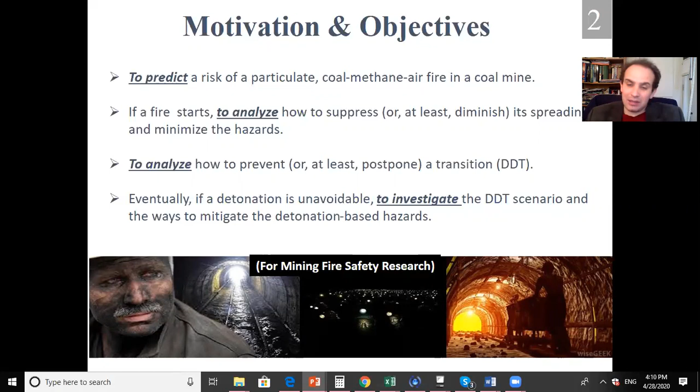While pressure rise up to like 1 bar, comparable to 1 atmosphere, can really kill people and crush even structures. So that's something serious. So when you look at this picture, why do I show this? We have some kind of coal mine tunnel, right? Does it remind you of something? Remember, we spent a couple of lectures on flame acceleration and DDT, and talked about the finger flame scenario. Why? Because finger flame is Reynolds independent and scale invariant. So it can be a nanotube, a microcombustor, but it can also be a tunnel like this coal mine.

So basically, imagine you have a coal mine, a long tunnel, and you have a sudden explosion somewhere at the center of the corner. Let us describe very qualitatively what will be the stages of fire propagation. What happened first? You may see on this picture. First you have ignition, a micro explosion, and then your premixed flame in your air dust environment will propagate, will expand, first spherically with a smooth front. But what happens next? Two things may happen. One thing, remember finger flame acceleration: when you start approaching the wall, it will be like this.

But also, in fact, coal mines, it's a big domain. It's actually 2 meters of diameter. So the Darrieus-Landau instability may and will develop in this configuration.

Here it is. So the Darrieus-Landau instability will develop. So instead of smooth flame, you will have cellular flame structure and the flame will accelerate. Later, you will have this kind of two-finger flame that will propagate faster to the walls.

After this, what will happen? It will be a wall friction scenario. But remember, wall friction scenario is not very important because here we have a big Reynolds number. So most likely now in the mine it will not be significant.

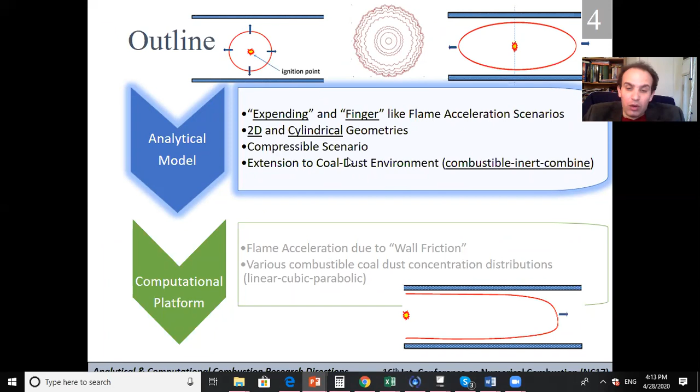Do we know all of them? Yes, we do. Remember, this is chapter 10. This is chapter 11 and 12 together, right? Actually, chapter 12. So that's what we are going to do. We will consider expanding and finger flame acceleration scenarios, and we will develop it. And also, I will show we have a computational platform that allows us to consider how flame propagates.

So, finger flame—again, what I will show you here, if you are very good students, you may remember it from previous lectures. It will be nothing new here, but it will be new how you can combine it. Remember the finger flame scenario? Remember how it goes. Here you may see a movie of how finger flame goes from the axis, and that's what you have. You have a channel, you ignite your finger, and it goes.

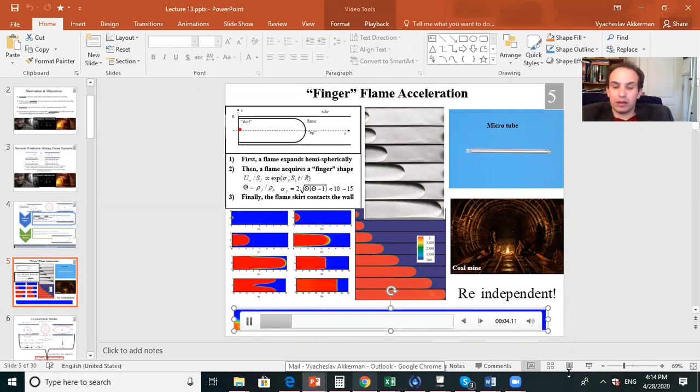Let me show it here. This mode. It goes, because the initial stage of propagation is quite long. And here on my screen it goes, and you might see the whole scenario of how the flame shape appears. It goes, it accelerates until the flame skirt touches the wall, but then acceleration stops.

And what is important here, you may see two things. One, that you will have the same scenario in micropipe and in coal mine. You will have the same flame acceleration with the following exponential acceleration.

So what is our analytical model? What can we do? Here we combine expanding flame theory—remember expanding flame theory, remember this formula for the Darrieus-Landau instability, how flame accelerates—and finger flame acceleration. How do we combine it? Rigorously you should simulate it directly, which is difficult, but we do something simple, because you may realize that when I talk about coal mine, when I talk about a big flame surface, I mostly should not care what happened on small scales.

So basically what I will consider is finger flame acceleration, but instead of planar flame parameters, instead of what we call SL for finger flame acceleration, now we will have the Darrieus-Landau parameters. So instead of planar flame velocity, I will have the Darrieus-Landau velocity, which depends on the characteristic size, which depends on the Darrieus-Landau cutoff scale.

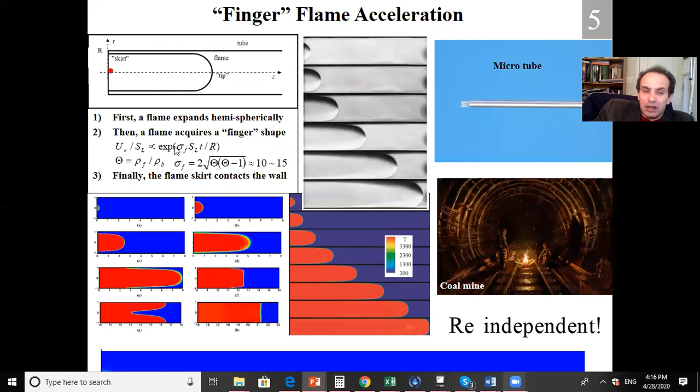Everybody remember this? Again, I don't request you to rederive these formulas. If you did homework number 5, you should be flexible with this. But I want you to realize that what we are doing is we take finger flame acceleration theory, but now instead of S_L, I will have a time-dependent Darrieus-Landau term, which shows much faster acceleration.

And if you do it, that's what we see. That is your finger flame theory. You may see that first you have hemispherical flame expansion, then your flame will become elongated, and then it will touch the wall. Here you may see the characteristic timing, characteristic equations, at which the flame will have transition from spherical to finger shape, and at which time it will touch the wall.

Here they are—just the timing, and you may see this time versus equivalence ratio. And here we can see it for methane, also propane.

You may ask me, why do we talk about propane? For several reasons. One, I am physicist rather than engineer. I always, when I investigate methane propagation, want to have some other fuel to compare, to have comparisons to see, because propane is much more explosive, we want to see how it goes.

Second, we don't talk about coal mines only. Very often in subways, in other setups, we may have propane explosion. For instance, propane is classical cooking gas that people use. And if you talk about future subways with tunnels, which have cars filled with fuel tank, it can eventually be propane explosion. Plus in coal mines, very often people use some kind of devices that may contain propane.

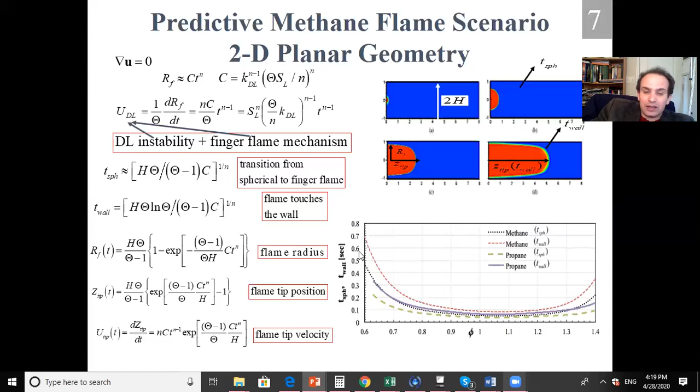So here you may see characteristic flame propagation characteristics versus here upstairs. You can see the stoichiometric combustion, and you may see how flame tip velocity, flame tip acceleration, and flame tip position change with time. Here is acceleration stage from T spherical to T wall. This is when flame starts propagating and did not touch the wall yet. So you may see this acceleration, it's quite big, so your velocity can attain 600-700 meters per second.

I want to also point out flame tip position. So basically it will go very fast. This is our timing. In 0.1 second, in 100 milliseconds, flame will penetrate through 8 meters. So it's quite big, quite fast. So people cannot run away from it, but some robots, some devices can turn on alarm, they can do it. And even some person who will not survive in this catastrophe may put some button on the alarm.

Typically why also these timings are important? Because what is the smallest time that you resolve? What is correct? Because when we talk, we count by seconds, right? But what is the smallest time that your eye resolves? Well, it depends on people, of course, but you know the effect of cinema of the 25th frame. Because in almost any movie, typically you have 25 frames, at least you should have 24 frames per second, then you don't see how they're changing. It means that your typical resolution time of your brain, of your eye, of your ears, is about 50 milliseconds, something like this, one 20th of a second.

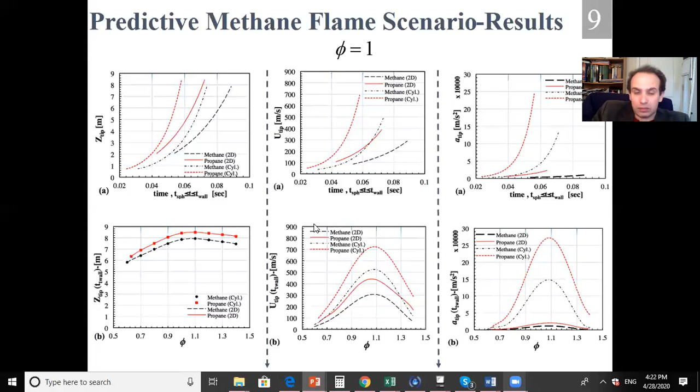One of the key parameters of combustion is what people call run-up time and run-up distance. What is run-up distance? It's how long does it take, distance and time, for a flame to detonate. So we start with a flame, it accelerates, and eventually detonation happens. Estimations we make here are quite raw, by order of magnitude, but it's okay, because when you want to survive, it's okay to see how much time you have - seconds, milliseconds, or microseconds.

So how do we estimate here? We know the following: detonation is supersonic, deflagration is subsonic. So by order of magnitude, when do you switch from flame to detonation? When the velocity becomes, by order of magnitude, sonic velocity. So that is what we do - we know how the flame goes, and when flame tip velocity becomes sonic, it means that it may detonate.

This allows you to find characteristic timing and characteristic velocity. What you see here is for two-dimensional, and if we talk about theories, we consider two-dimensional and cylindrical configuration. You may ask, why cylindrical? Dr. Derek Johnson once asked me, when do you see a cylindrical coal mine? My answer is: I did see a cylindrical subway, and in a subway it propagates like this. Regarding 2D, well, 2D is a simplification, but typically we may have a rectangular or square cross section, which resembles this. So we have theories for how flame run-up distance - the detonation distance at which detonation happens - depends on phi.

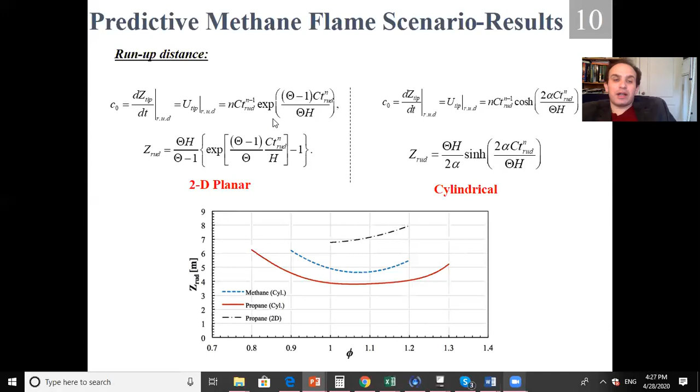Now, another point: in reality, we are more lucky than you may see here. Because remember, when the flame accelerates, it slows down. We discussed it. And eventually it saturates to some steady regime. So in fact, here are equations that we can use. We have an isentropic approach for density, pressure, and temperature.

We extended it. Again, my task here is not to teach you how to solve these equations or ask you to reproduce them. The idea is to teach you what you potentially can do in combustion research, right? This is a fundamentals of combustion course, and after you pass it, you should know what book to open and what research directions exist.

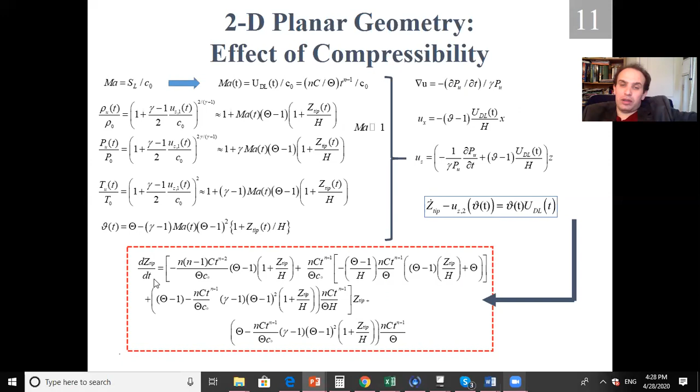So basically, this allows you to account for compressibility, and we come to the final equation which describes propagation with account for compressibility in rectangular, two-dimensional configuration, and in cylindrical axisymmetric configuration. Here it is. So you may see on this picture that it's really important to account for compressibility. So we are on the safe side. And now I talk about finger flames only, not obstacles yet, because obstacles and wall friction used to be considered small.

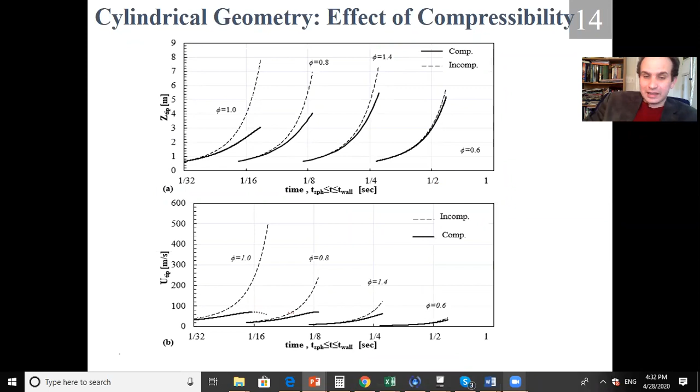Okay, so now, the next portion is most important. Why do we talk about coal mines when I talk about methane explosion? Because there is dust in coal mines. It is the dust mixture with coal that gives you something. So in fact, even if you have premixed combustion, you have a mixture of what?

What are premixtures? You'll have a mixture of methane and dust. Dust is solid; these are dust particles. Their typical size is quite small, some kind of micro, like from 10 to 100 microns. They're quite small, so you hardly see them. So what will you have? You will have gaseous combustion with these kinds of particles.

And how to deal with it? How to investigate it? Of course the correct answer would be, okay guys, you should do simulations or some kind of measurements of multi-phase flow. If you want to do a serious study, you should consider multi-phase simulations. But we are lucky that we can do something easier. There is the so-called Seshadri formulation, which allows you to incorporate solid particles, dust particles, into our consideration.

So what do we do? You realize, in fact, that there are not many dust particles in methane. Your dust particles, typically it's 100, 120 gram per meter cube. So the volumetric fraction does not exceed maybe 1%, even 1 promille. Mass fraction is larger because it's solid, but it means that you are lucky. There is a way how you can describe it. Instead of considering multi-phase flow, multi-phase fluid, we do some simplifications.

It's lazy but sophisticated. Instead of considering methane combination with coal dust, we will do the following. We will consider an effective fluid. I will say I have effective methane, effective fluid. So I will replace my gas particles by some effective fluid. But in this new effective fluid, transport properties will depend on dust. And that is the Seshadri formulation, that's how we can incorporate it.

So instead of planar flame speed in this new system, I will have dust-induced flame speed. Does it make sense? And it will exactly play the role of planar flame speed. You may ask, how can you do it? Very often people ask, why do we talk about gas, about fluid mechanics? Because when you take a cigarette or burn any kind of wood stick, it looks like it's solid.

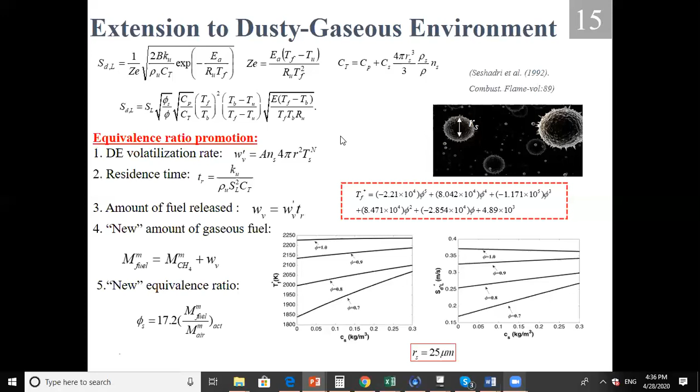So what we can do here is account not only for combustible particles, not only coal, but sand as well. That's what we do. And this allows us to extend our formulation. What will happen? Here will be our new modified equation. And you will see what we account for here. We account for the modified equivalence ratio. And here we account for the so-called heat sink effect.

It means that your particles will get heat from combustion, which moderates the fire. But on the other hand, after this, it will promote the equivalence ratio, it becomes an extra source of fuel. And we realize it is dust particles which actually give you promotion, which actually explain why fire happens.

Again, the Seshadri formulation is purely theoretical work. It was 1992. Dr. Seshadri is a professor at the University of California, Santa Barbara, if I'm not mistaken, San Diego, I'm sorry. He works on fire safety there, but not for coal mines. He just developed how planar flame speed depends on solid impurities. Here, what we managed to do is incorporate these formulations to consider an effective fluid.

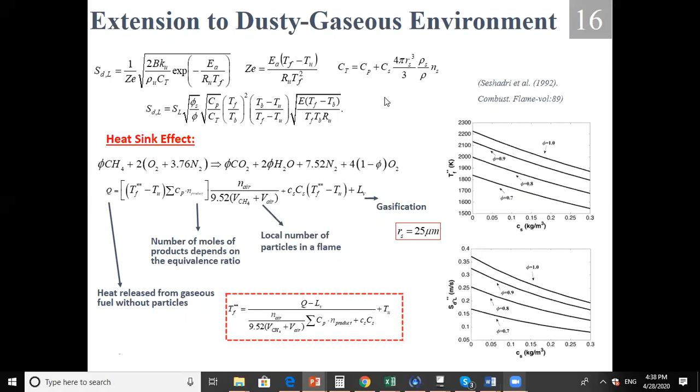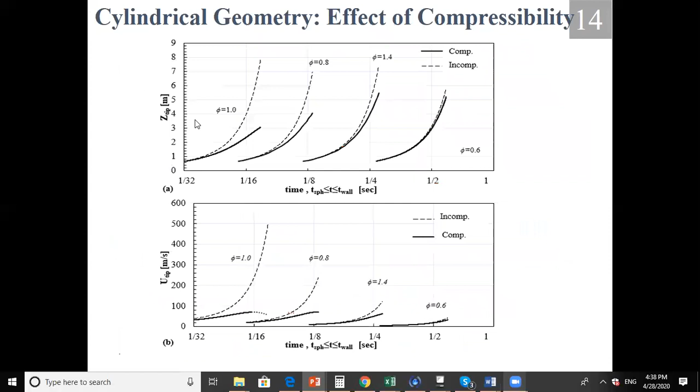So basically, here you may see what we can do: combined effect of promotion and prevention of acceleration. And here are modified versions of what we saw before. So remember, let me go back here. So here was how the flame propagates. This is flame tip position, and that is flame tip velocity for compressibility, how it changes with time.

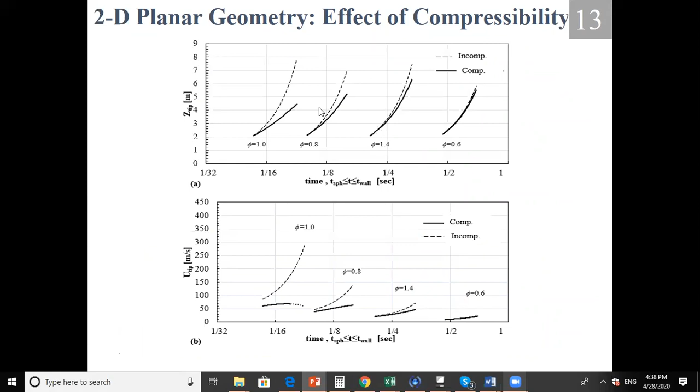Now I will show you the pictures, how they look when you incorporate particles. Again, the dashed line shows exponential acceleration, the solid line shows the effect of compressibility. And again, you may see that when you have slow acceleration far from detonation, it's okay to employ the incompressible formulation. But when you come closer to it, you should consider compressibility. So here it is.

What you will see here, we incorporate different scenarios. Here we incorporate coal particles, and this is flame tip position. On the right-hand side you have cylindrical configurations. Here you have rectangular configuration. Here, time dependent. So this plot corresponds to coal particles of size 10 microns. This one corresponds to 75 microns, and this corresponds to no particles.

So you may see that in all the cases we consider equivalence ratio 0.7. You may ask why it's so big, but in fact, here we already account for the effect of particles. It's already a promoted equivalence ratio. And if you took an equivalence ratio like 0.5, without particles it would be too small and there would be no combustion. Another point is concentration. Here we take 120 grams per meter cubed. It's the typical concentration in this condition. Again, two particle sizes are considered, 10 microns and 75 microns.

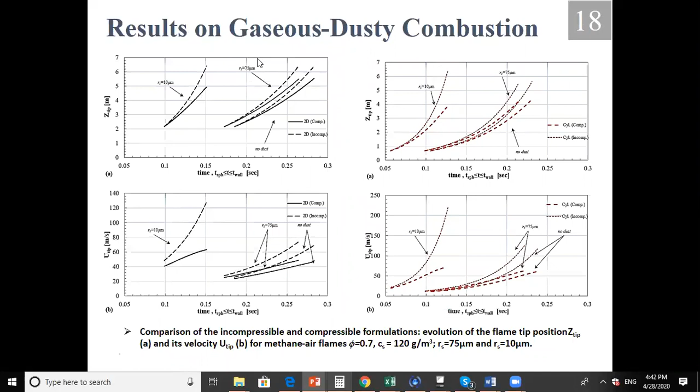And now something curious. If somebody wants a bonus ticket, please explain to me why here I have a declining line for the tip, but here an increasing line. Before, tip position and tip velocity were quite collinear, right? Because this is the derivative of this one. Why here do you have a monotonic increase for tip position, but a monotonic decrease of the velocity? And here it's vice versa. What do you think? Why are the trends opposite?

Please think about this for a couple of minutes. Maybe not a couple of minutes, because we should end the lecture in 15 minutes, but a minute. Does anyone have an idea about this?

Well, the answer is quite simple, because in fact we talk here about maximal velocity and maximal position when the flame attains the wall. So it's not this one on the right, it's not the derivative of the left-hand side. Because what happens? The flame propagates and touches the wall. So the faster the flame velocity, the sooner it will touch the wall. So its propagation will take less time.

So basically what we have here, if your tip velocity is lower, it will touch the wall later, so the tip will be larger. It's very simple. The slower you go, the longer you will survive. But the key point here, you may realize the effects. So definitely inert particles kill the flame, they slow down the process; combustible particles promote it.

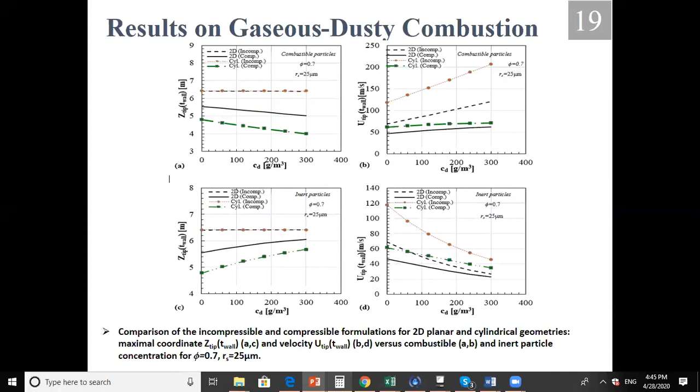We started with gaseous combustion, then we incorporated particles. And we combined the theory of expanding flames, this is chapter 10, and added finger flames, chapter 11, and we described it. Another thing I can show you is we also have our solvers. So if you want to simulate coal mines, we can do exactly the same story that we did before, because we managed to incorporate coal particles into the solver. Again, we incorporate the Seshadri formulation.

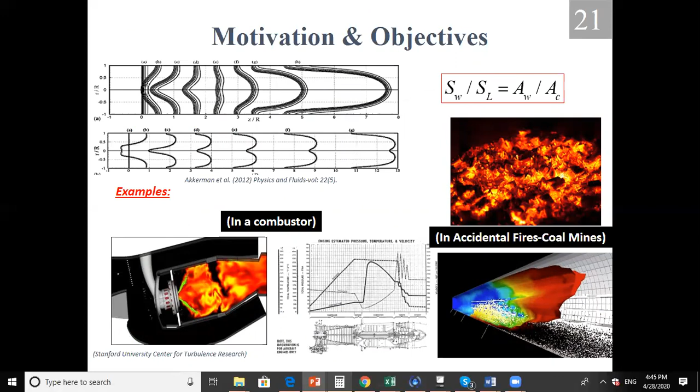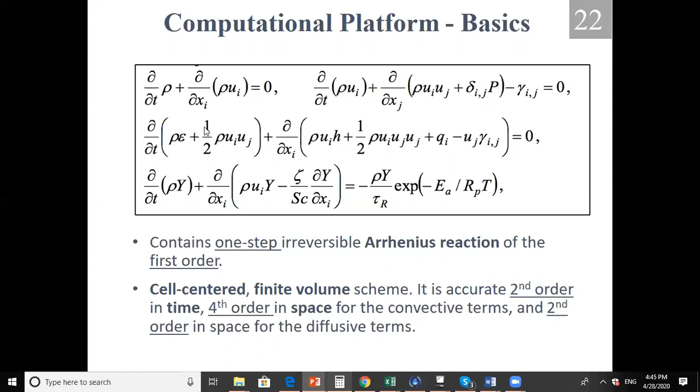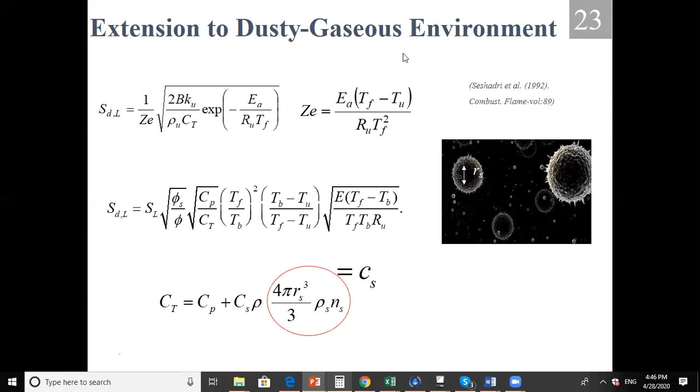So here, if we talk about simulations, is our classical platform that we use. You may know that it's continuity, Navier-Stokes equations, energy, species. And what we did, we employed the Seshadri formulation to deal with it. Again, it doesn't mean that you should use our solver, but that's the way you incorporate it. So now, instead of using multi-phase simulations like people do in ANSYS Fluent or Star CCM or other solvers, potentially you can incorporate the Seshadri formulation and deal with effective combustion.

And what we also investigated was an interesting point, because very often people ask, what is the real dust distribution in coal mines? And that's what we investigated. Because if you have different distributions, it can promote or slow down the flame acceleration. For instance, in a finger flame, the flame tip propagates in the fastest manner, while the flame skirt propagates in a slower manner. So you may realize that if the flame tip goes through dust while the flame skirt does not, you may elongate

or compress the flame. So we considered different kinds of scenarios. We considered different dust concentration distributions inside the channel, inside the coal mine, and saw how they promote or prevent the flame. Here you can ask me, what is the real distribution in coal mines? And my answer is, I don't know. For a couple of years, nobody could actually give me a real distribution.

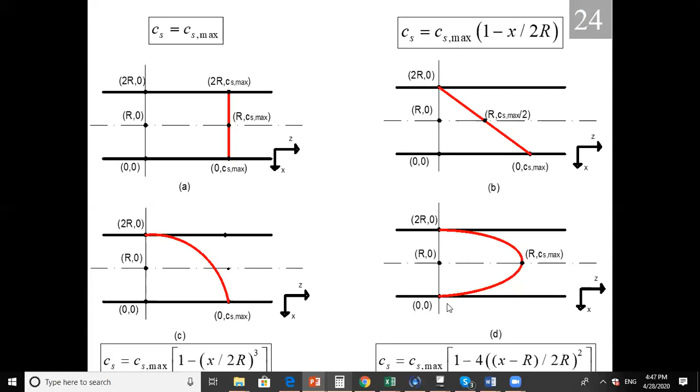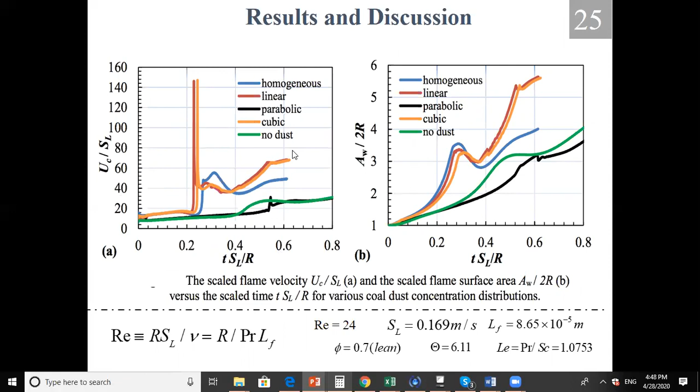We made simulations of how the flame goes with time in the case of homogeneous distribution of dust, linear, parabolic, cubic, and in the case of no dust. And that is how flame velocity changes, this is how surface changes. Remember pictures like we saw in the previous lecture. That was for finger flame acceleration and for the wall friction effect. Here we do the same, but now we incorporated these various dust particles.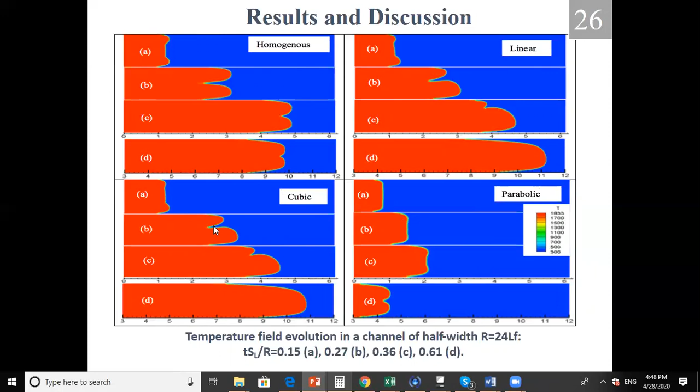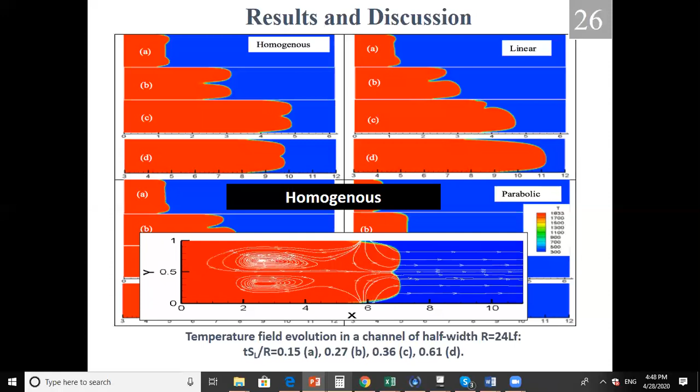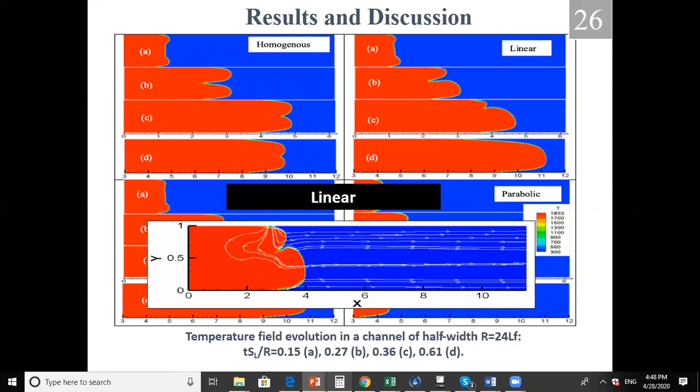And you may see these strange features, because now you have different dust distributions: homogeneous, linear, cubic, parabolic. This is exactly what you saw in lecture 12. And that is how it will be when you non-uniformly modify the dependence. And our result, I hope the movies will show how it happens. That's how homogeneous goes. It's uniform. That's how linear goes. When you have a linear distribution, you see it gets elongated and propagates. That's how the cubic distribution behaves.

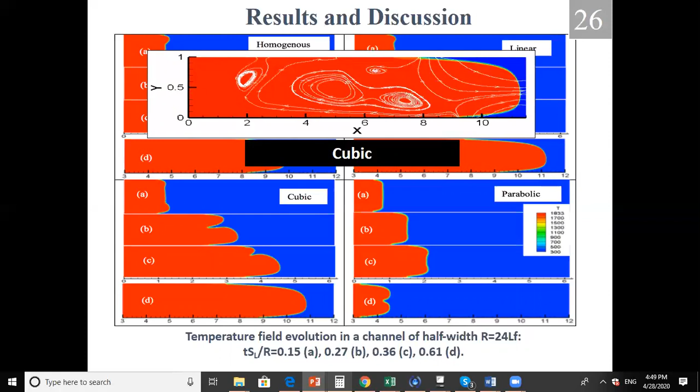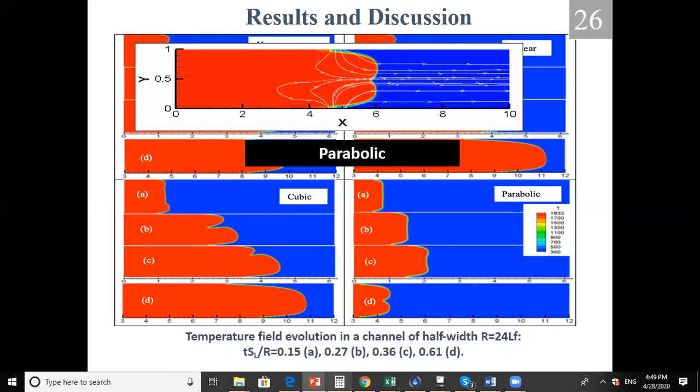And that's the parabolic distribution. Well, you may see that definitely parabolic and homogeneous are symmetric, while cubic and linear are non-symmetric. So basically what our conclusion was here, I can tell you, that, well, was it my last slide?

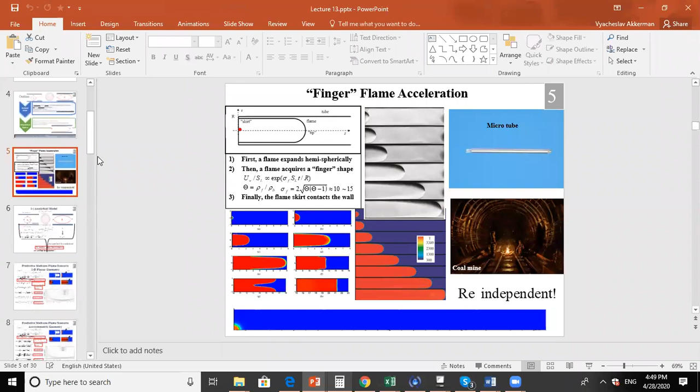Yes, it was last. So basically, the preliminary conclusion from here was that we are lucky that any kind of distribution provides slower flame acceleration than uniform. And you cannot have uniform distribution in coal mines. And this gives you another strategy how to deal with this, how to avoid, how to kill the flame. Because all distributions will actually suppress flame elongation, suppress the geometrical effect.

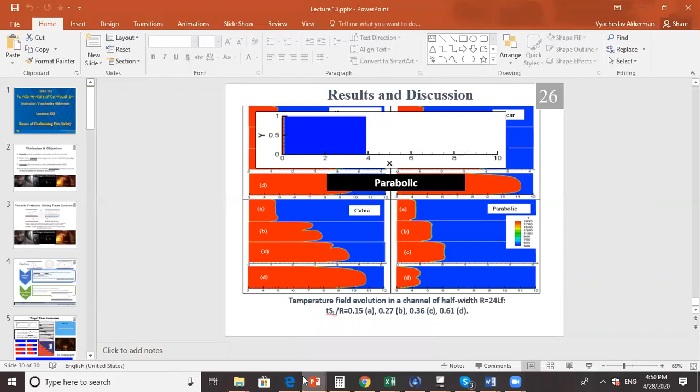Okay, that was chapter 13. Please ask me questions. Please ask me questions. May I believe that everybody understood everything?

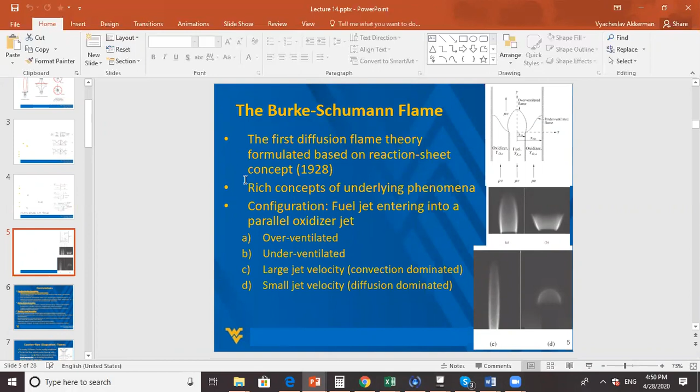Well, there is one more chapter, chapter 14. I will not go through all this chapter today, and actually I will really limit consideration here. But the key points that I want to discuss here, I just want to give you basic hints. So far what do we deal with? We talk about diffusion flames and premixed flames, and most of the course was about premixed flames. And I mentioned a little bit that sometimes we deal with partially premixed flames.

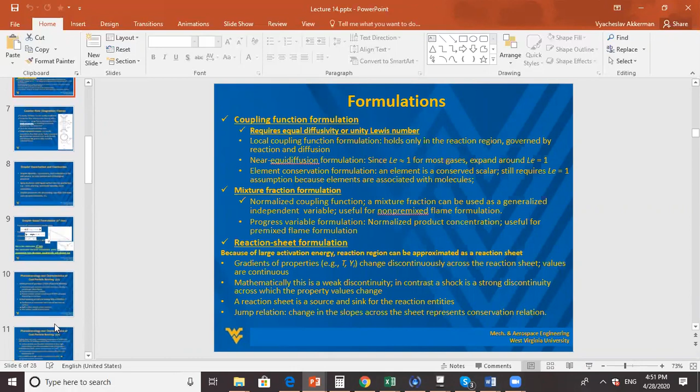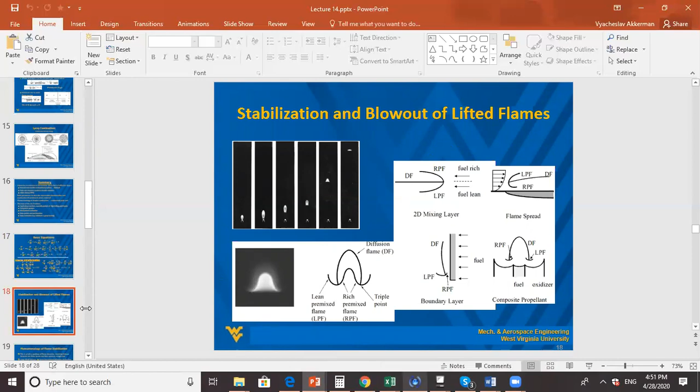So what I want you to realize, and actually what I will talk about, is that sometimes we have a combination of these flames. A typical scenario happens if you have a picture like this, you may see on my screen. So basically that is the so-called triple or tribrachial flame. Imagine you have a nozzle and there is a flow from the nozzle. I think I should show the configuration, yeah, like this.

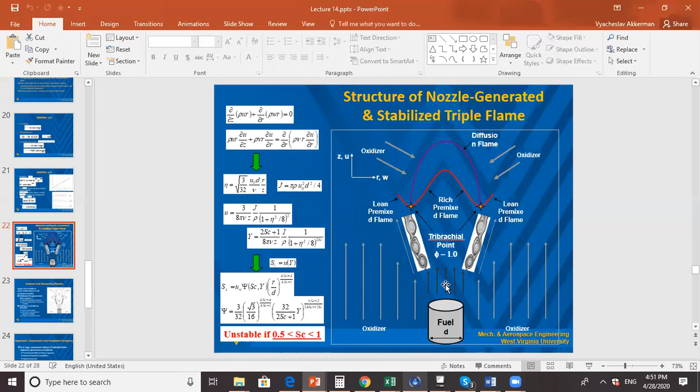So basically, imagine you have some kind of fuel which goes here, and you have oxidizer which goes here. That's the classical scenario that may happen in rockets, when you have any kind of nozzle, any kind of propulsion. So generally speaking, what will happen is a diffusion kind of flame. We have about 10 minutes, so I will show a basic introduction. So typically, in the bulk flame, most combustion happens here in a diffusion mode, isn't it?

But here, we also have mixing. So fuel is mixed with oxidizer here and here. This mixing actually provides some kind of premixture. And in addition to this diffusion bulk flame, you will have two premixed modes here, and the same here. Sometimes it will be a whole premixed mode, or sometimes it will be just partial. So here is the general picture. Sometimes it can be attached to the nozzle, sometimes it can be lifted up.

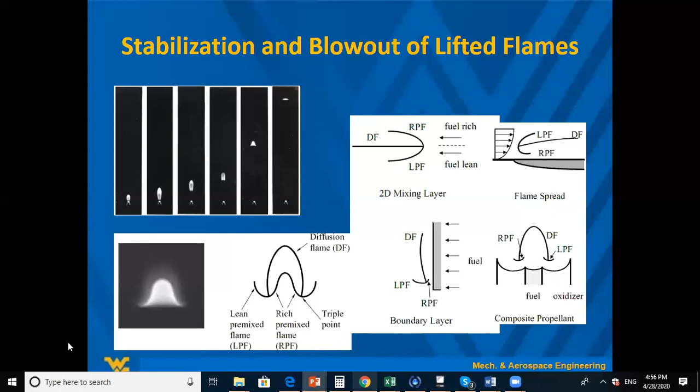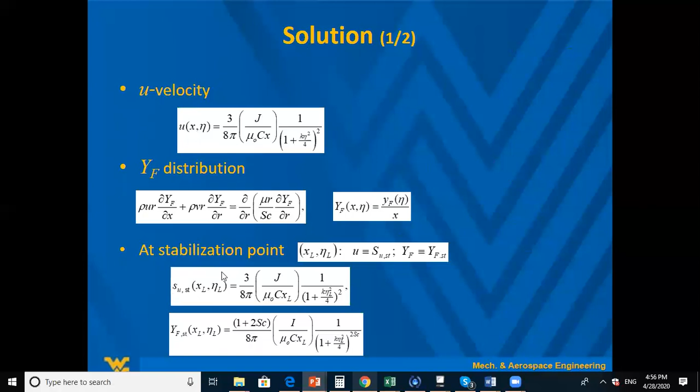Remember the Bunsen burner and homework number 4 - it was a question about the Bunsen burner, when it was compensated by the flow. We said your planar flame speed cannot exceed flow velocity. Same story here - you have flow velocity, so when you generate a flame, it's generated such that it's balanced by the velocity. It's your nozzle velocity which generates the flame. So at the stabilization point, your flame and mixture fraction become a function of the inflow velocity.

That's really nice to realize, and we have steady conditions. So basically that is my structure. If I want to describe this picture, this flame, we see that your planar velocity is now a function of flame and flow parameters. It will be a function of the radius of this channel, of position, and of the diameter of this channel.

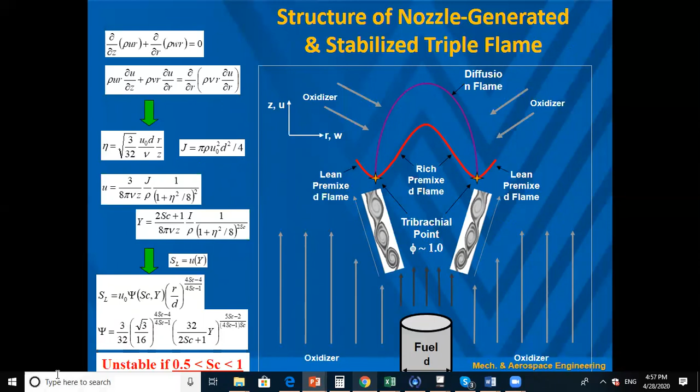There's classical theory by Chung that only if the Schmidt number - remember, Lewis number is the ratio of Schmidt to Prandtl number - when Schmidt number is in a certain interval, you may have stable or unstable solutions. I want to recall the different components of how we consider instability interaction with combustion: Rayleigh-Taylor instability, Kelvin-Helmholtz, diffusional, thermal, and parametric, as we discussed.

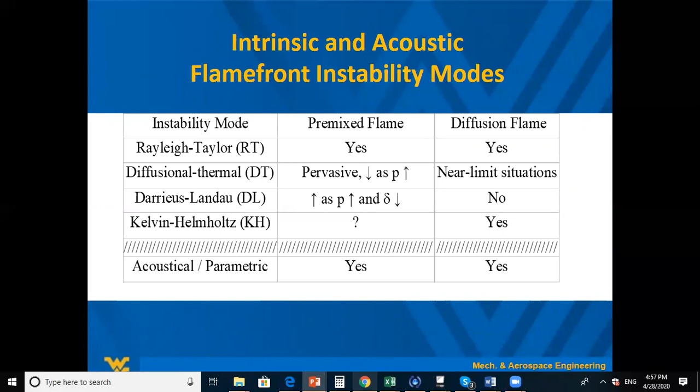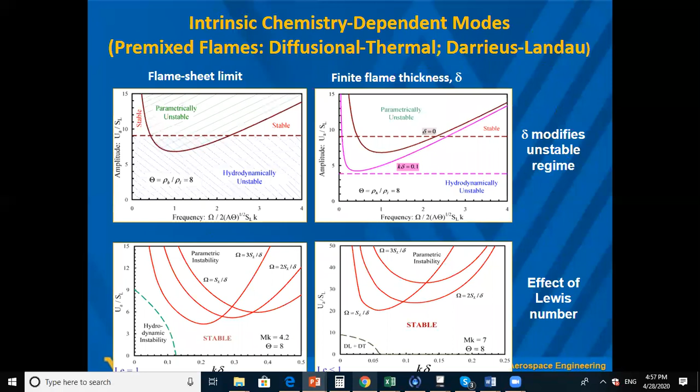Remember how we considered instability - if you consider flame propagation by the front, you may consider the linear solution and impose the acoustics. I believe you saw these pictures when we talked about flame-acoustic coupling in chapter 8. Now we can employ exactly the same strategy here. But the key point is that now your scaling, your planar flame speed, will be a function of space, and if you describe the stability here, you describe the stability of the entire fluid. That's why almost the entire course deals with premixed flame - even in fire safety and forest fires you have diffusion flame, because this segment is really premixed-based combustion.